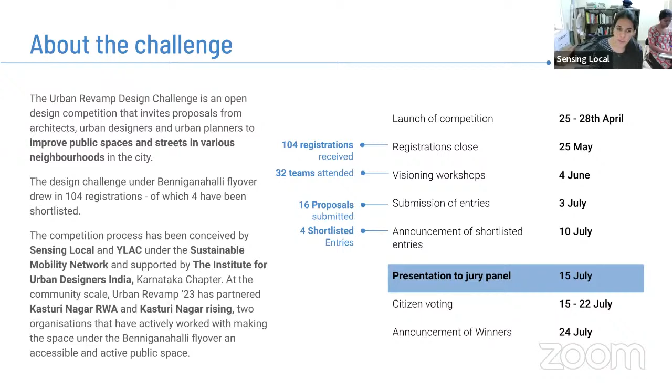We are currently in our presentation to the final jury panel. All the 4 shortlisted designs, apart from being scored by the jury panel, will also go out for citizen voting. This will be put up in the next week for the community group around, and post that we will be announcing the winners on the 24th of July. I would like to take this opportunity to introduce our esteemed jurors, all doing some amazing work out there.

Vinayak sir is not here. He's the Chief Engineer, BBMP Projects Department, but we have Hemlata ma'am here, who's the Superintendent Engineer at the BBMP Projects Department. Hemlata has actually been someone we have worked very closely with. She has anchored several projects related to TenderSURE roads, white topping, junction redesigns, under-the-flyover space reimaginations, and bringing a lot of innovative projects into the sphere of BBMP itself. She's also been part of several SWM projects previously under this department.

Rajiv, who's our next juror, is a program manager with WRI, and I'm sure all of you are aware of the work that WRI does. Rajiv has been anchoring several projects related to transit-oriented development. He himself is an architect, urban planner and urban designer. He is also a project anchor for the Hubli-Dharwad transit-oriented development project currently going on with DULT.

The next is Aruna. Aruna is the Joint Secretary of IUDI, also the co-founder of SDEG. I'm sure if you had attended Design Uru, you would have interacted with her, definitely one of the anchor persons even for that. She has worked on large-scale projects and multiple urban initiatives, and definitely believes in designing effective public spaces. She's also won multiple awards and spoken at many national and local forums about her contribution in the field.

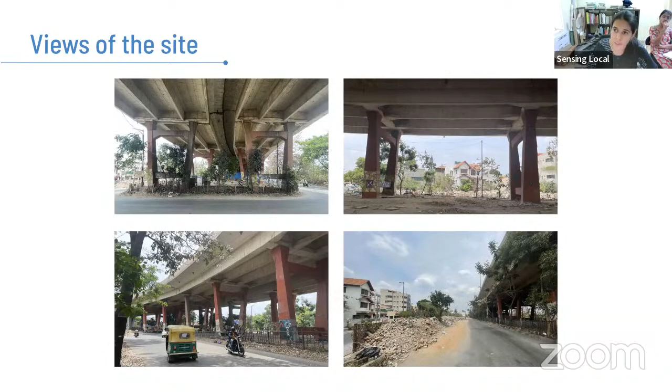Insights from the participatory workshop. We did several activities. The activity mapping, visioning statement, and a couple of issues is what I would like to bring to your notice.

The three predominant activities are: people who want to go to Vivekananda Park; people using it as a connection to Old Madras Road, so we have a lot of people cutting across the site; and a few vendors where people stop and shop. That's the current activity happening there, but we hope new activities get introduced, and you'll see it in the proposal.

The issues, of course, there are several issues on the site. This was all done by the citizens where they voted on the issues. The top 5 issues were unsafe crossings, dumping of waste, speeding vehicles, dumping of animal corpses and chicken waste, and it seemed an unsafe zone because of lack of lighting.

Within this, the priority was towards dumping of waste, dumping of animal corpses, and bad odor, which is really making it quite an eyesore, as well as from the smell perspective, not a pleasant place to be in or around.

Through the vision statements, there were several, but some interesting ones we pulled out: people would like a walking path, an amusement park, access to the lake itself which was not direct, better solid waste management facilities, animal waste to be taken care of, and a wish that the park gets rejuvenated. They're also looking at a feeder bus to the metro and designated parking spaces instead of parking on roads.

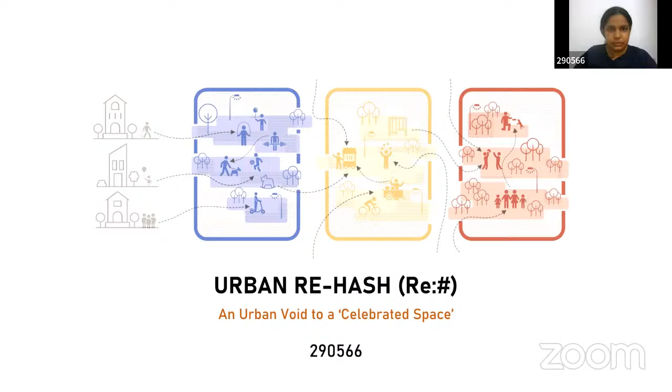Kasturi Nagar, an affluent residential neighborhood, landlocked between a flyover, multiple railway tracks, and a large lake, is surrounded by multiple open spaces lying dormant, like the Kasturi Nagar Park, the area under the flyover, a large green railway buffer, and Swami Vivekanand Park.

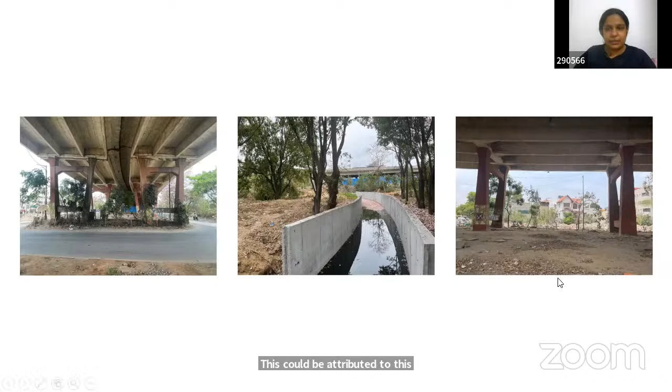However, despite so many open public spaces, there seems to be missing public life. This could be attributed to the spaces being unhygienic due to extensive garbage dumping, unsafe because of fast and disorderly traffic, missing crosswalks and footpaths, and poor lighting.

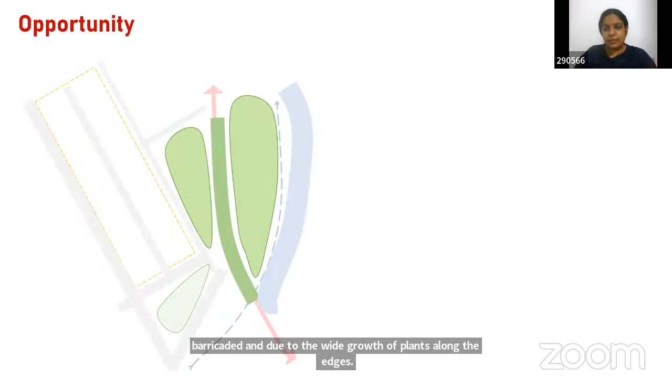These spaces are also inaccessible as they have been barricaded and due to wild growth of plants along the edges. Yet, the site comprising Kasturi Nagar Park and the area surrounding it is brimming with the possibility of having one seamless large open space.

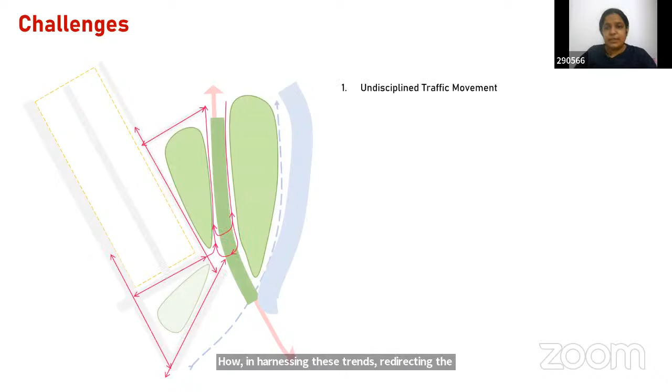There is an opportunity to rethink and redesign pedestrian movement for better connectivity. The abundance of natural wealth can be banked upon to create a sensory experience and have the site brimming with flora and fauna. However, redirecting the scattered movement of traffic and resolving the unsafe and complicated junction poses a challenge. Thus, the project Urban Rehash aims to amalgamate the fragmented open spaces into a coherent public place that caters to different levels of activeness, age, social groups, and safety concerns.

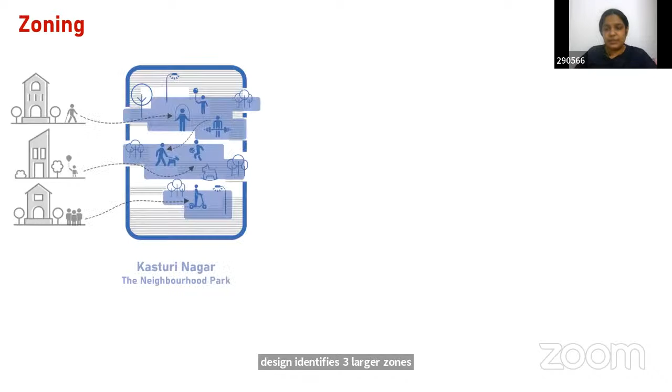To engage the diverse population and cater to their varied needs, the design identifies three larger zones. The Kasturi Nagar Park is imagined as the daily use leisure space for adjacent neighborhoods, catering to various age and social groups, and serving as a gateway for locals seeking relaxation.

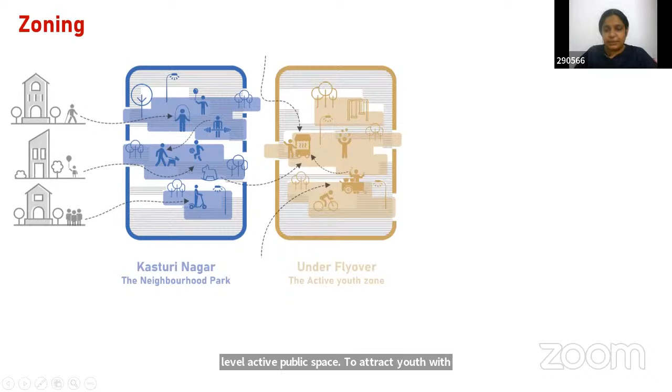The area under the flyover is designed as a district-level active public space to attract youth with opportunities to play, eat, and socialize in a safe and well-lit environment. And the lush green buffer will be the city-level public space, transformed into a picnic spot with lush greenery, cool breezes, and beautiful plants, birds, and insects benefiting from its proximity to the lake.

Coming to the placemaking strategies, to resolve the problem of the unsafe junction, traffic is being rerouted so that we can provide a signal-controlled junction here, while using this whole space as a single public space.

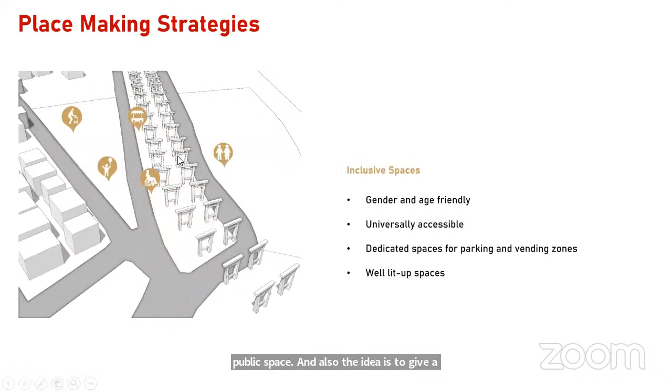The idea is also to give an inclusive design with respect to gender and age, universally accessible, with dedicated spaces for parking, vending zones, and well lit up spaces.

Talking about safety, cobblestone paving and tabletop crossings are provided to reduce the speed of traffic, and adequate lighting and signages for orientation and bulb-outs at the junctions are provided for safety.

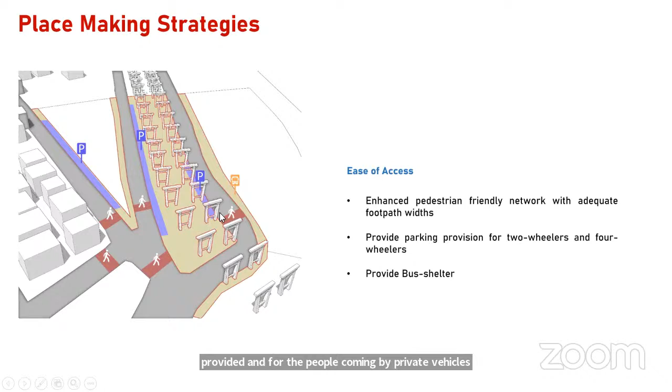For people coming by walk, tabletop crossings along with adequate width of footpaths are provided. For people coming by private vehicles, two-wheeler and four-wheeler parking pockets are provided. And for people coming by public transport, a bus shelter is provided here.

Talking about the Nala, the idea is to integrate it into the public space design by naturalizing its edges and planting native species around it.

These three street lanes are being redistributed to achieve a 4.5 meter wide carriageway and a 2.5 meter wide footpath. And these tabletop crossings provide a seamless connection between all three zones.

The BBMP shed is being retained with a facelift along with a composting unit proposed here. And the Nala's width is being increased at a few places, making it a vibrant water body, integrating it into the public space.

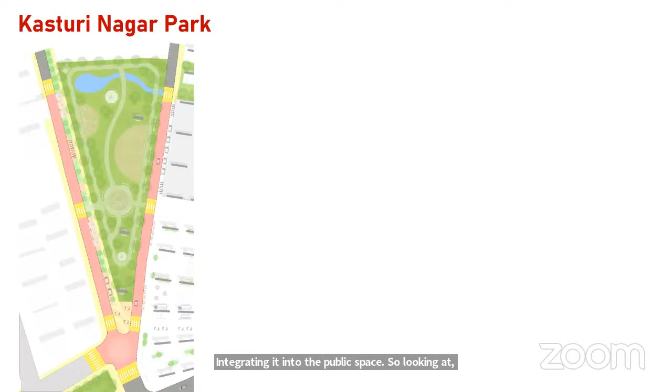Looking at Kasturi Nagar Park, from the visioning workshop it is understood that people require a day-to-day recreational space. So this park is designed with walking or jogging tracks, shaded seating spaces, kids play area, open gym, sports facilities like a badminton court, space for yoga or a laughter club, and a biosphere with a kitchen garden around it.

A plaza space is provided near the junction. This is the kind of space in front of the park entrance where we have tabletop crossings and vending zones, making it a welcoming feature. Around this biosphere, we can have kitchen garden kind of spaces where people can use it on a day-to-day basis.

So this is the character view near the junction. This is a signal-controlled junction with tree seating spaces and easy connectivity to the surrounding areas as well.

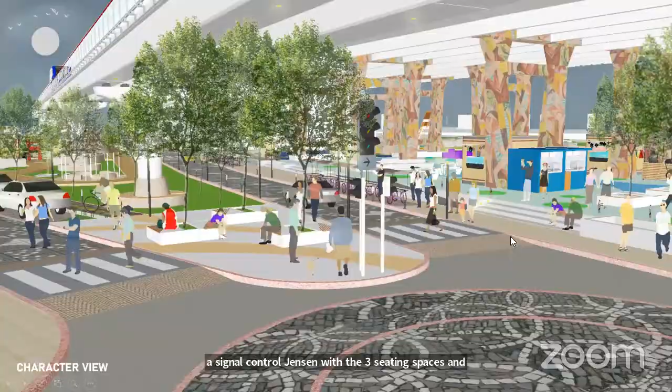And the under-flyover area, since it has road access on both sides, is mainly designed so that people from the residents as well as people from a little farther off areas can also use the space as a hangout spot. So small kiosks, food courts are provided along with plaza kind of spaces, and sports facilities like a skating rink are also provided.

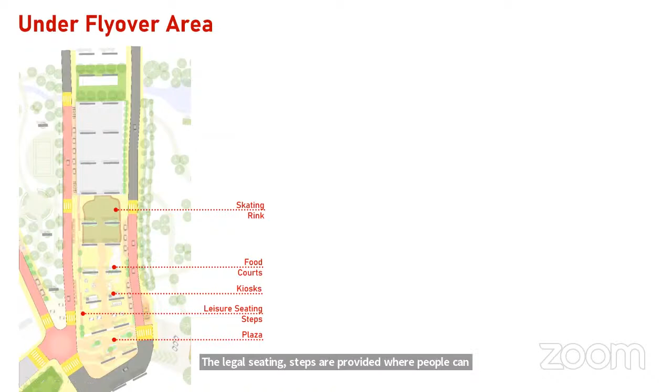The edges of the under-flyover area are a little raised from the road level. Making use of that, leisure seating steps are provided where people can enjoy the traffic with a cup of coffee. Parking spots are provided on either side of the road.

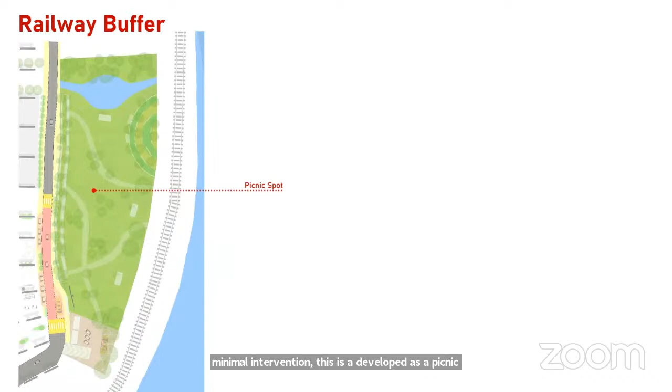For the railway buffer, since it comes under buffer area with minimal intervention, this is developed as a picnic spot or a community gathering space, and small events can be hosted in this space. Even vehicular access is provided inside, with all the basic facilities like public toilets and drinking water points.

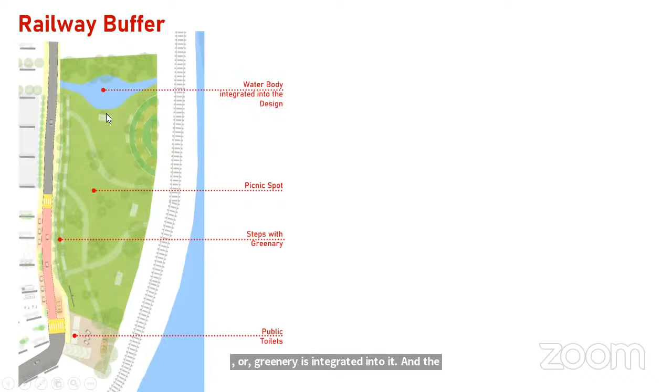All along the edges, seating steps or greenery is integrated into it, and the water body is also integrated into the design as an attraction. Watchtowers and strollways are provided within the green buffer.

The transformation is planned to be carried out in 4 phases, each improving the quality of public life. To start with, the area and its edges have to be cleaned of garbage and debris to improve visibility. Next, tactical interventions bring behavioral change like rerouting traffic, painting crosswalks, junctions, parking spots, and roads.

This also generates revenue through paid parking, which feeds into the next phase of developing Kasturi Nagar Park and its edges. Leasable vending spaces can be introduced to further generate revenue for the 4th phase, of activating the under-flyover area.

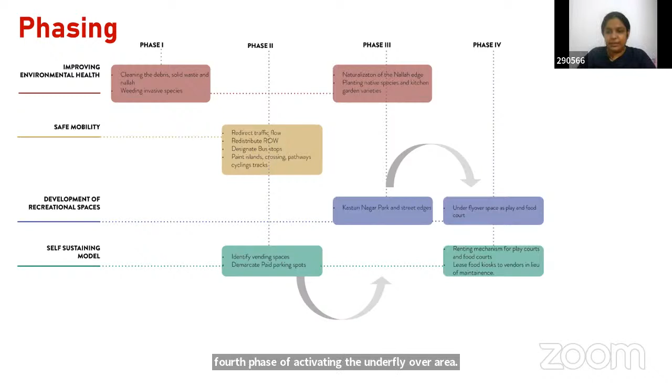These spaces can be earmarked for smaller gatherings and events apart from the daily life that will occur there. Eventually, the green buffer will be transformed in the last leg of the project development, and the revenue generated can be channeled into the maintenance of these spaces over time.

Thus, the urban rehash proposal rehashes the way we approach our public places, and through effective but minimally invasive interventions, transforms the Kasturi Nagar public spaces into a self-sustaining hub for social life, which looks like this.

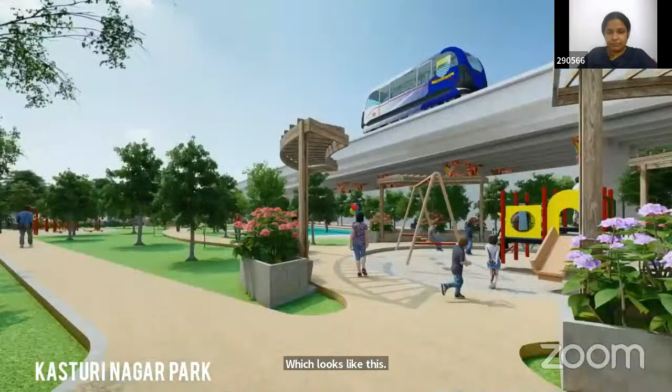In conclusion, thus the grounded design approach and temporal spaces bring Kasturi Nagar and its public spaces to life. Thank you.

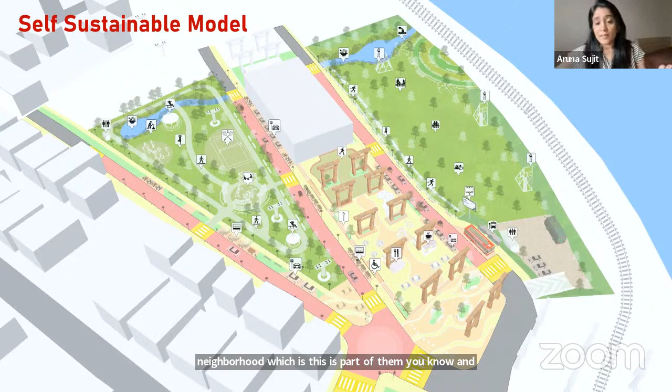Interweaving of neighborhood and the city level - where does that happen, where does that not happen? And in your drawings, now that you've done such great work, where are those fingers coming in from the neighborhood, which say this is part of them, and therefore we're giving it out to the city? So where is that sense of... did you get what I'm saying?

Yes, yes, we did get your question. Thank you for that question. It's actually a very important question, because like you said, the ownership - people feel that they connect to the space and they are very passionate about it. And that is why when we were transforming, when we were looking at the design, the first aspect that we thought of was the kind of activities we'll be proposing, because activities sort of anchor the spaces.

And that is why when we were designing the Kasturi Nagar park specifically, we were very sure that the activities we wanted to give was what the residents, immediate residents, needed or wanted. So it is actually for leisure, the kind of things that you would do on a regular basis, like take a walk, a morning walk when you have a routine, or you go to the park with a group of friends. So those kind of activities we made sure to incorporate in Kasturi Nagar Park.

Then moving forward, where we would want it to be a little more active, and probably want more people to be coming in, that is where under the flyover we differentiated. This place could have more visitors, and what brings in more visitors is more variety of food options, a little more vibrancy, a little more crowd. That is why we kept the under-flyover area a little open and had activities that cater to more people, and a specific user group we focused on here was young people who would want to be playing sports - and we didn't limit it to just Kasturi Nagar, because that sort of opportunity to play free sports is missing across our open spaces, so we tried to keep that within this area.

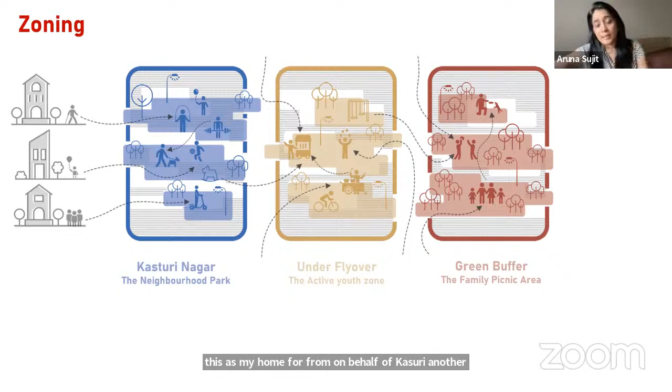Maybe it didn't come through clearly. If I consider this as my home on behalf of Kasturi Nagar residents, there is one level of privacy, then semi-private, then public. So where does one stop and the other begin? Because after some time we give this amazing vision, and it becomes a problem when you can't stop it.

Who are we to stop the public from using this? Right now we are doing it for two things: primarily the network at the larger level. As an urban designer, and also as a Kasturi Nagar resident, city is very important to me. The systems should not be broken, which is your flyover, your metro, and under the flyover.

The other thing is me being part of Kasturi Nagar. After some time, what we provide should not become a nuisance to them in the end. That's always a challenge, I don't know how to deal with that. So that kind of clarity is already there in your activities, but I don't think it's coming across in your drawing. But yeah.

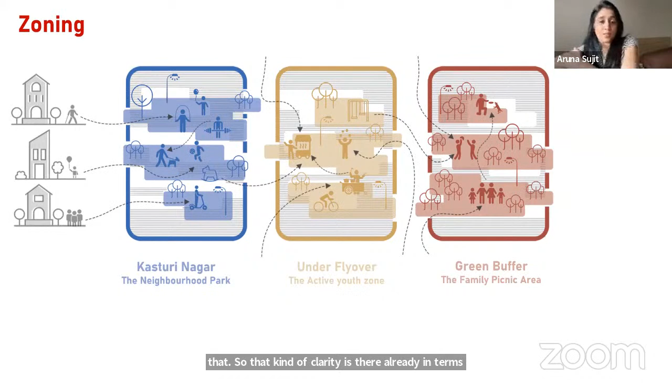I have a question, go ahead Ankit. Some of the issues around the site are mostly around dumping that is happening. If you look at the issues on site, how is your design responding to that? The number one issue was garbage dumping and animal waste. How are you solving for that?

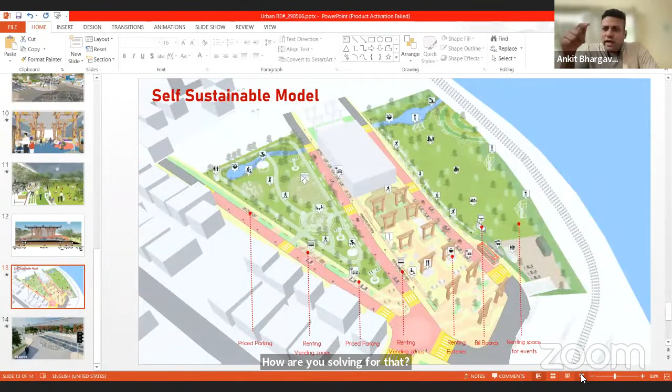Second, if you look at the Rajkaluve itself, it's actually full of sewage. So how are you looking at solving that? Because you have to solve it by design. Right now it's pretty much sewage water, so opening it up doesn't help.

Third question, you can answer one after the other: I see that the edges, whether it's the water or the road meeting the park, are of concern, especially the tertiary road on the railway line side, which is still a thoroughfare with city inter-neighborhood traffic happening there. I wanted to understand that, and also the railway side, since you can't really touch the railway. So I'd like to understand your ideas around treating these edges, whether it's the water in the park, the road in the park, or the railway in the park.

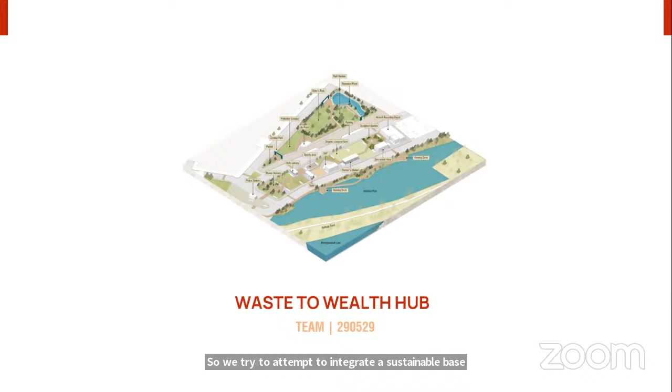We are going to talk about our proposal, the Waste to Wealth Hub. We attempt to integrate sustainable waste management practices with placemaking principles, creating vibrant and efficient ecosystems that maximize resource recovery. Our objective is to create an innovative urban node linking diverse ecological resources, transit nodes, and movement corridors, generating a waste to wealth system that gives citizens of the neighborhood an alternate reason to be proud of.

Moving on to the area level strategy, it aims to implement sustainable waste management practices that engage local communities and optimize infrastructure to preserve the lake's ecosystem and promote a circular economy. During community interaction, the elders spoke about their aspiration to utilize this area for a better purpose, so we took cues from it.

The broader area level strategy was to first tie up the various assets surrounding the site, including the lake and its fragmented wetlands, Kasturi Nagar Park, and Vivekananda Park, finally connecting it with transit nodes such as the upcoming metro station by pedestrian linkages, enhancing the everyday experience of residents.

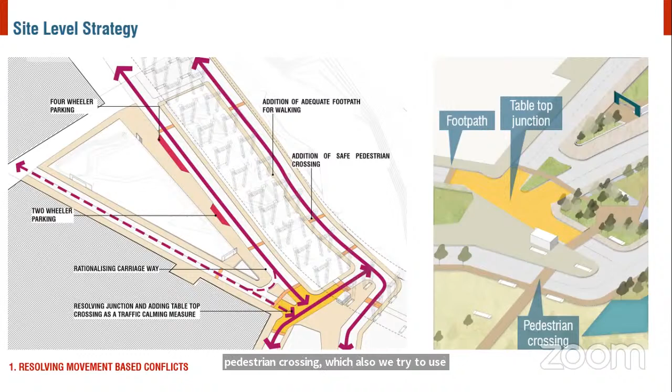Keeping this in mind, we tried to resolve movement-based conflicts by redefining the right of way of the highways and surrounding access roads, rationalizing the carriageway, providing adequate footpaths, parking zones, and safe pedestrian crossings. We also resolved the junction to achieve safer pedestrian flow by providing a tabletop crossing.

We also tried to add new programs to build an ecology and economy around the waste. Instead of removing the whole waste processing unit, we integrated it by providing a high-tech waste recycling unit, from which inert waste is used to produce public art that can be reused and sold at a zero waste shop.

The organic waste from all over the site will be treated in an organic compost farm to promote urban farming, from which fresh produce can be used in a farmers market and organic cafe to promote recreational activity.

The underutilized wetland will be converted into a wetland park by creating a constructed wetland, which will naturally clean the grey water coming from the Nala and the residential area, and soon create its own natural biodiversity zone. This can also decrease flood submersion scenarios on site by restricting access, and odor can be reduced by vegetating with native plants around the area.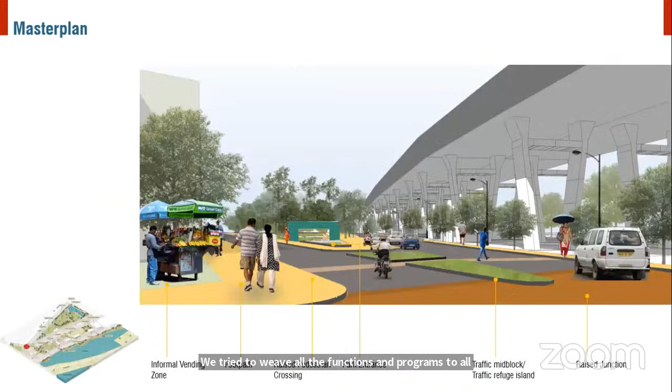This is a view of what we're trying to achieve, showing informal vending and more eyes and surveillance on the site, which can be one of the ways to reduce crime or illegal activities going on in the site, as we found out through informal local conversations.

This is the view of the sculpture garden and the organic compost farm, and finally the view of the park showing the pedestrian trail connecting to the under-flyover zone. Finally, the impact assessment shows what we try to achieve on site.

The whole aim of the project, and how we try to see it, is to use waste as one of the main sources that is not shied away from but actually integrates the whole community.

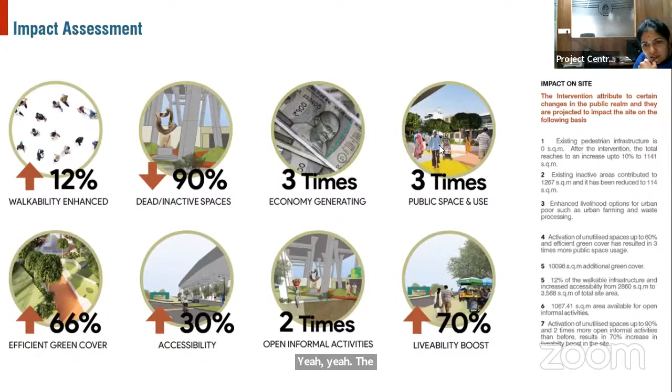The proposal is looking at the farming and composting done in the same area. What is the quantum of waste being received from the two wards? There's waste coming from two wards, so what is the total quantum coming in? Are you asking about the amount of waste?

Yes, that wet waste. That wasn't in our scope. But when you make a provision for composting, composting when it starts decomposition gives pungent smells and such. How much quantity can be handled, because it's daily waste coming there? So the area allotted for that also has to be considered.

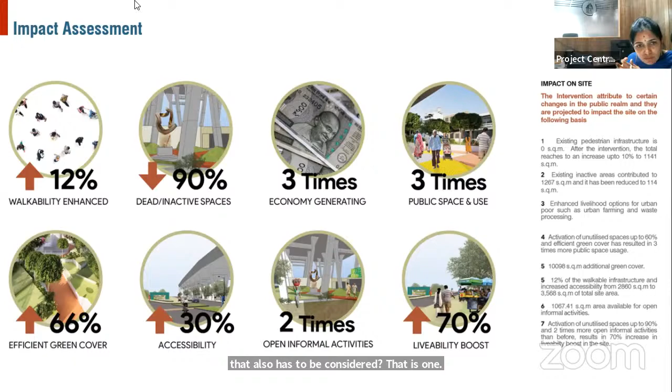That's one point. And the second point is about the farming you've suggested—what kind of farming, and who is it actually for? Is it for the neighborhood, or someone from the government side, someone needs to get them there. What does your plan actually say?

For the farming or organic compost farm, we thought not directly from the neighborhood, but rather there are a lot of squatter settlements around the site, on the adjacent edge of the railway track, towards the Benniganahalli Lake side. We were looking at those squatter settlements, thinking we could integrate them into this process, because otherwise we cannot. The main idea was to integrate the urban poor, so this organic compost farming and related activities like selling the produce would become an alternate income source for them.

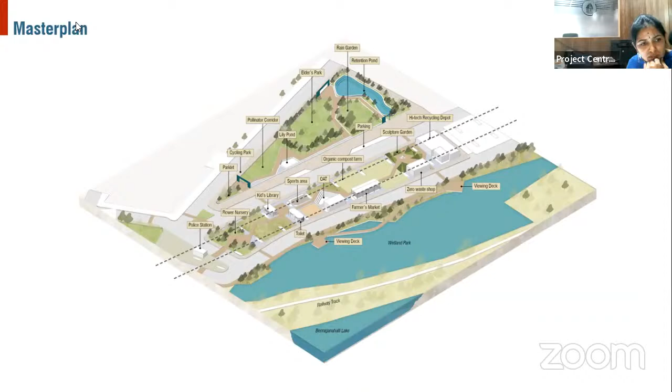Also, one more question I had for the previous presenter as well: the wetland shown here—what actually is it? It's a buffer of the railway department.

At present, from the site visit, we saw there was already a ditch there, and the drain coming from the Kasturinagar neighborhood had the entire grey water directly going into this ditch. We thought of treating that by making constructed wetlands so the grey water gets filtered, and working around its edge to make it a more attractive wetland park.

Rajeev, I believe you had a question. Yeah, I'm still a little confused about this whole wetland section. My question was: if you see the Raja Kaluve extending and the canal extending to the other side, it has a dead end—is that continuing underground, or is it actually a dead end, meaning there's stagnation of water, creating other maintenance issues?

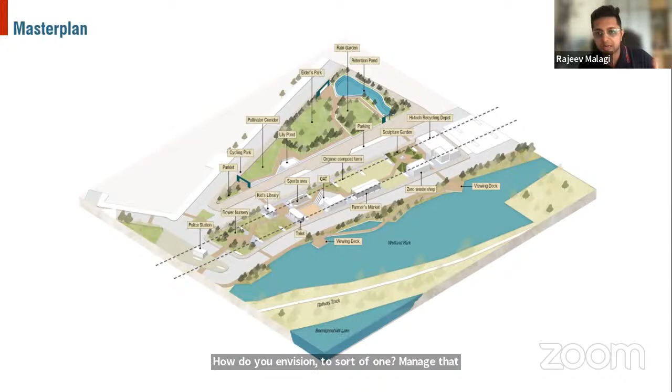The connected question was about this wetland park you've shown—how do you envision managing it in terms of smell and overall management, including the canal, since I believe that whole thing is an interconnected system?

That was one. And my second question was about this high-tech recycling depot—it will also, to some extent, encourage vehicular movement, like trucks and smaller trucks coming and parking there to get the waste out, right? How have you considered not obstructing current traffic movement, since the roads are right next to it on either side? Just to figure out how you're going to manage the traffic and the wetland ecological treatment part.

I'll start with the high-tech recycling depot question. If you look at the master plan, on the right side of the high-tech recycling depot, there's already a provision kept for the trucks which will carry the garbage and unload it into the processing areas. That was one way we thought of resolving this issue, so it doesn't obstruct the thoroughfare and through traffic of the service lanes of the highway.

For the wetland park, we used indigenous species and a tree lining all over the edge as strategies to tackle the odor problem. But other than odor, the most critical problem we found was people dumping animal corpses there, and a lot of illegal activities happening. To tackle that, we thought of increasing visibility, which would also help stop these activities from happening. That was the basic strategy.

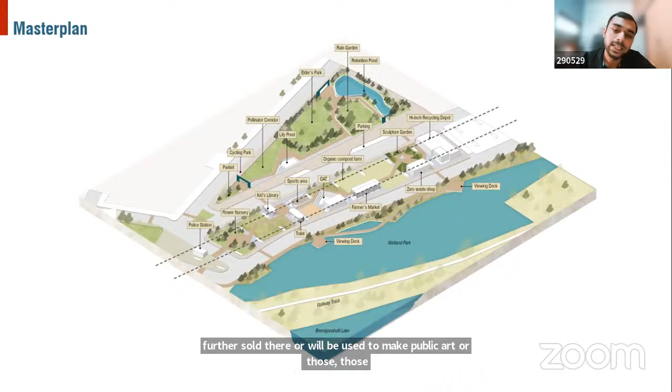What is a high-tech recycling depot? It will have one area where waste is processed. Already a first level of segregation happens in households, and then it comes to the high-tech depot where a second level of segregation happens, separating organic and inorganic or inert waste for further processing. Since we talked about the zero waste shop, this waste would be processed and sold there, or used to make public art and associated things. The organic waste will be used for organic compost farming. So it will actually have all these functions together.

One thing that came up in the discussion with the community is that they did not actually want a dry waste center there at all, because it wasn't catering to that want. So by expanding that, you kind of have to justify that land they actually want used for recreation and other things is going towards something else. The way you're describing the high-tech depot, it's sounding the same as a dry waste collection center - I don't know what the difference is.

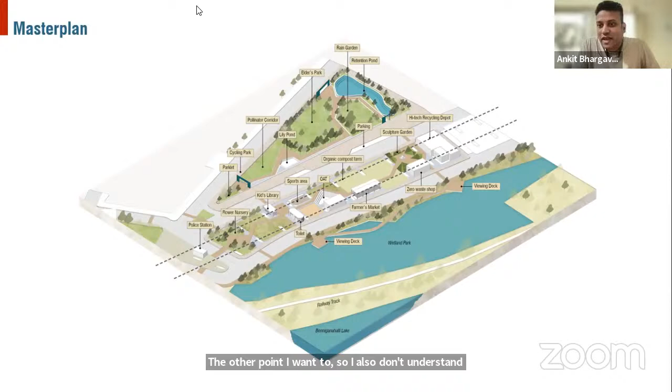The other point is I don't understand what farming under the flyover means, because it's not as if you get sunlight there most of the time - there's dissonance happening right there. I also don't see the Raja Kaluve extending itself from the park to the wetland in your drawings - I see that missing. Fourth, I think the way you've drawn the wetland park right now is closer to a lake, which sends the wrong signal to someone looking at the drawing who doesn't know what's happening here.

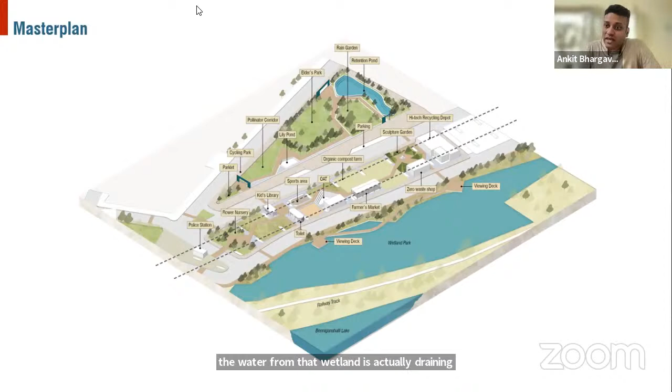If you look at the site right now, the water from that wetland is actually draining into the Benniganahalli Lake - there's a hole where it goes through, but the level would be much lower, and you won't actually see much water at all. So the drawing is sending a false impression of reality, even if we implement your design. So I have 2-3 issues: the waste issue, second is farming, and third is the wetland. I'll stop there.

Are there any other questions or comments?

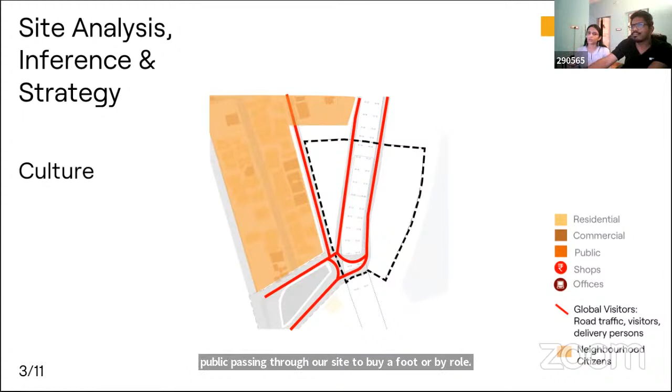In terms of stakeholders, we have two broad categories: global stakeholders, which are any kind of public passing through our site by foot or by road, and local stakeholders, the residents from the nearby localities and neighborhoods visiting the site.

In terms of program, our program responds to the various use cases, various users, and certain issues that the site faces at large. One major intervention is the BBMP shed that is located currently under the flyover has been strategically shifted towards the local neighborhood in an attempt to make sure that it is properly maintained and kept clean.

There is also a dedicated zone towards the north of our site for delivery personnel in the form of a rest point, placed centrally with easy access from both the flyover as well as the service roads.

Coming to connectivity, it is very clear that the site currently is largely vehicle first, wherein we have highly congested traffic nodes with fast moving vehicles that ply on the roads throughout the day, with very little importance given to pedestrian movement and accessibility.

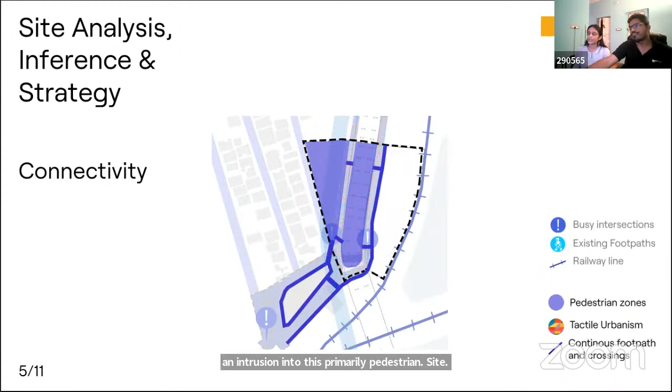This is addressed in the strategy by viewing the site as a pedestrian first zone, wherein any kind of vehicular movement is seen as an intrusion into this primarily pedestrian site. This connectivity is further enhanced by adding continuous footpaths and zebra crossings throughout.

In terms of safety and hygiene, it is very clear that the site suffers from levels of degradation, such as garbage, etc. We have viewed the site in the form of three different areas, moving from uprooted, neglected, and highly polluted. In terms of our intervention, providing various amenities such as public washrooms and dustbins throughout the site would help mitigate the issues caused by pollution.

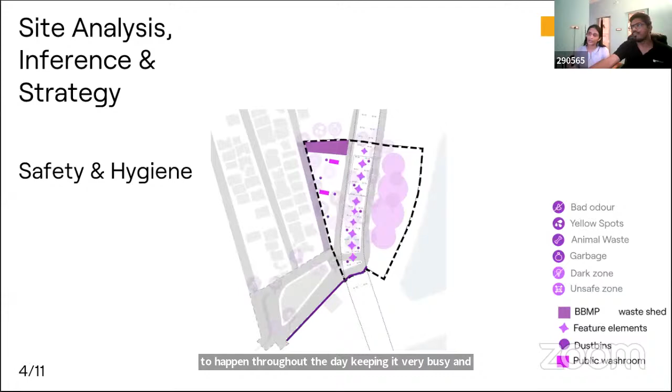The aspect of safety is treated through various levels. The program itself is designed such that the site allows for a lot of activity to happen throughout the day, keeping it very busy and safe. Various design elements have also been added to ensure that it is well lit.

Coming to our concept, our design mainly stemmed from the existing columns on site, which helps create Noolus or threads that tie together the various spaces. These then go on to form Neralu or bays, which are surfaces for building our various site level programs. These create or frame these perspective zones for various activities to take place. Noolus translate to these vertical elements in the form of bollards, landscaping, trees, posts, pillars, etc.

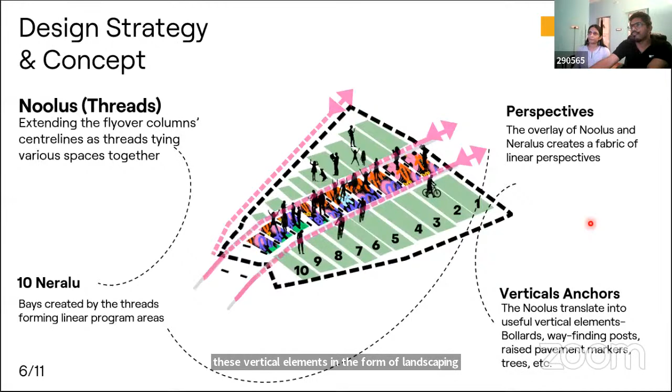After having created the 10 zones or the Neralu, we have different types of zones for each one of us: yoga recreation zones, open schools, dog parks, senior citizens park, flea market, and different scales of gathering space as we move on and see in the master plan.

After having identified the three zones as the uprooted, neglected, and the polluted, the master plan took birth from that. The first thing that we tackled was on the south, we closed up one lane of the road to include it within the under-flyover space, and that allowed this turn to slow the vehicles down, because our overall aim is to make it more pedestrianized, and this turn allows you to do that.

On the north, we introduced a loop road to access the BBMP shed for the trucks in the mornings, whereas in the evenings, that same road top space acts like a parking for the food trucks to park themselves away from the main road.

Shifting the BBMP zone here on the north creates this large uninterrupted 3.75 acre urban space at the bay. So we didn't just look at it on a master plan level at this scale, but rather, as we discussed earlier, there are these 10 bays that we created running from west to east.

That's helped to bring down the scale to a human level, having had 3 subspaces. Neralu 1 would have the BBMP shed, and then the delivery zones, delivery persons parking, and resting spot.

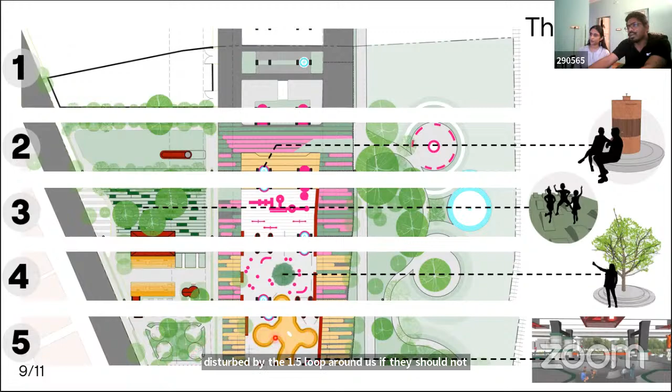Coming to Neralu 6, we have the dog park, which is cordoned off by the bollards, since they didn't want the dogs to run helter-skelter, as people are apprehensive about that.

Spread across Neralu 6 and 7 are the two badminton courts and basketball courts.

Neralu 8 and 9 has the police watchtower, the orange colored one that you're seeing there, which acts like a visual anchor element for the traffic junction and the bus stop there, and also the temporary exhibition space under the flyover.

Finally, on Neralu 10, we have a space for people, a temporary gathering space for RWA meetings, for any demonstrations as such.

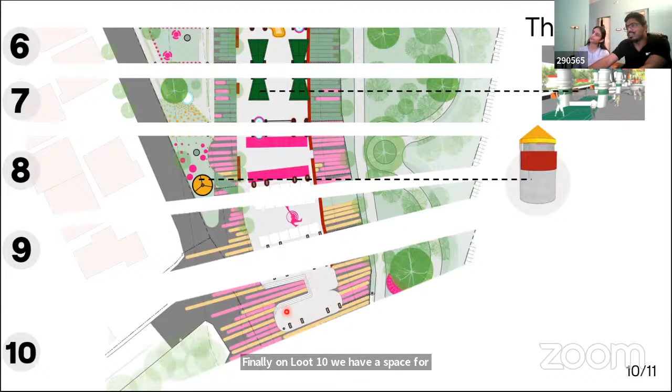Coming to the walkthrough, we will be starting from the second main road, abutting the residential area, and gradually move towards the flyover.

Starting off with Neralu number 2, this is for yoga, recreation, and habba area. This is Neralu 3, which is a children's zone. Neralu 4 has a plant care and OAT area with pods for areas like daily dump.

This is Neralu 5, a senior citizen zone overlooking the skate park. Neralu 6, which is the dog park. Neralu 7 and 8 comprises of the bus stop as well as the police watchtower area.

Raised pavement markers as well as painting the roads helps reinforce the concept of a pedestrian first area.

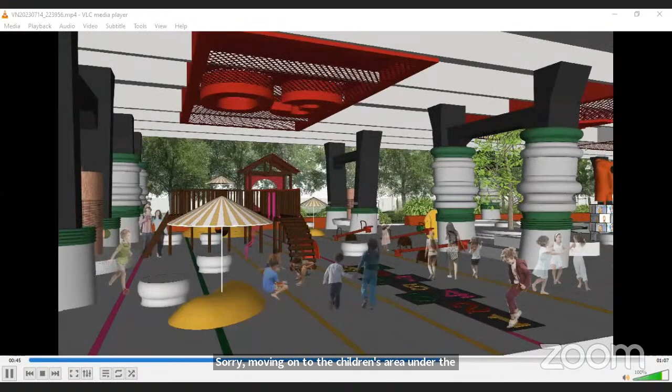Sorry, moving on to the children's area under the flyover, this is a children's art display as well as a Wi-Fi enabled neon tree zone. This would be the children's skating area.

We've clad the columns with these Channapatna inspired FRP moldings to respond to the sharp edges of the columns as existing on site.

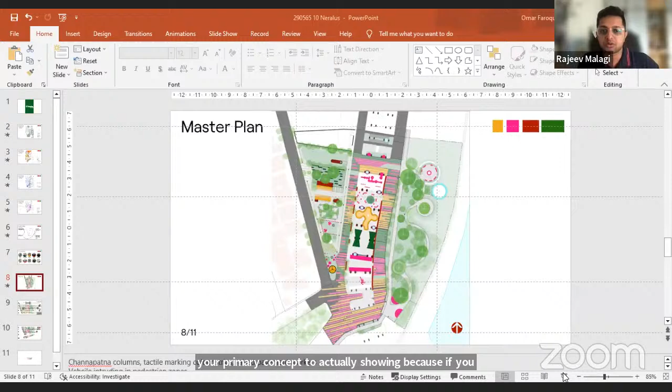But eventually, for some reason, when you start breaking them into smaller components, the left side is where you've done a lot of pocket spaces, but then I somehow felt the transition from left to right was completely lost when you moved from your primary concept to the actual design, because if you look at the park on the right, it doesn't have any translation of those sections you're talking about. Eventually it becomes an independent element.

So if you want to take your same concept of columns to the actual translation of design, I was really hoping that language could have been translated in some way to the other side of the site, also using landscape as a medium to do that. And the other first doubt I had was about the roads — you're saying you want to prioritize pedestrianization there.

Is it open to traffic or are you planning to close it? It is open to traffic, but our idea is that because of the surface being painted in this alignment, with markers at regular intervals aligned with the columns, we believe vehicles would slow down, creating a feeling of intrusion for commuters without endangering the pedestrian.

So if that is the case, that's the other concern I have. You're assuming that psychologically, because of these elements, vehicles would slow down, but someone who wants to reach somewhere fast would still speed up, right? There are other means to actually create heavy traffic slow movement zones while facilitating the movement of pedestrians from left to right.

If you had explored options of materials and design elements which could slow down traffic, or maybe created alternate loops—I'm not sure how practical that is—some portion could have been restricted to traffic, which also would have worked. But if that's not possible, there are still ways to slow down traffic, not just with paint, but with many design ideas and materials.

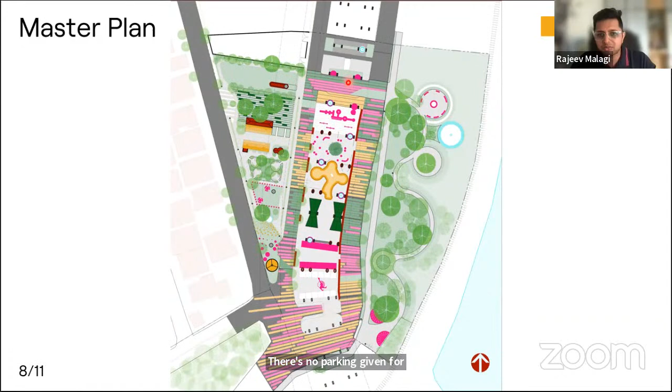Any reason why you're prioritizing food trucks and delivery services so much—is it a need in that area? Since the area on the left-hand side is bordered by a dense neighborhood zone, we imagine there's lots of zipping around of delivery persons. This is on the flyover, so any delivery person can come down, pop in, park, rest and go out. Even second main road delivery persons entering can do the same—that's why we prioritized it.

One question—am I audible? Yes. What is your thinking about the future scenario when the Benniganahalli metro station comes, let's say within the next three to five years, with Bayappanahalli on the other side? This is kind of a conduit, and probably this is going to get used much more than it is now. What future aspects of mobility have you taken care of, or what thinking has gone into the future scenario of this space?

In terms of future mobility, considering there will be two linked metro stations, what's usually common is a feeder bus that connects them. So we've provided a flat urban plaza which could function as a bus stop. This space would be a collection hub, a pedestrian node, almost like a signal point for waiting for buses. The place in general is like a collection point for people—we've integrated all kinds of activities and possible programs, making it a good pause space for anyone in commute moving from one place to another.

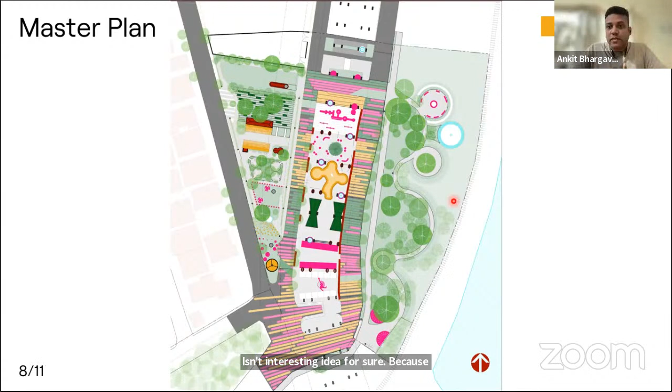And the second comment - I was quite surprised, using pillars as a way to organize the space, which is strange actually as a collective space, is an interesting idea for sure, because it gives a way to structure the space and divide and cause many things to happen at the same time. But to me it actually looked like a highly overstimulated space - almost like pop art, and it's not even real. I can't imagine this implemented because you'll bankrupt BBMP - the amount of elements, the amount of things happening. So just trying to understand the idea of an overstimulated plan on one side, and second, did you think about the road becoming fully pedestrianized, if being pedestrian first is your priority?

To respond to the first question about this middle road which connects to the flyover - if we wanted to make it completely closed off for vehicles, yes, that's a very ideal situation. But we saw vehicle movement as a necessary evil, because those vehicles would start overloading the second main road and then loop back near the Bangalore One Center. So our stance would be not to close it off for vehicles, but apart from the tactical measure of painting it - I don't know if it got captured or lost in translation - along those center lines of the columns, what we called nulu also translate as raised pavement markers, these yellow color pucks placed along, nearly 10 of them. That also aids, apart from the temporary painting of the road surface, to slow down the vehicles, is what we believe. So that's about the road part.

Coming to the second question about it being divided using the column center lines, and being overstimulated - yes it would appear so, but our aim was that it should not just function on a big scale as a big urban space, but dividing into these 10 zones, which vary from 10 to 12 meters between the columns, which are say 30 to 40 feet apart. It helps to bring down the scale. That was the reason for using the columns as a guiding principle of the concept. Along those grids is where smaller pillars get placed for wayfinding boards, to help one orient themselves in such a large space.

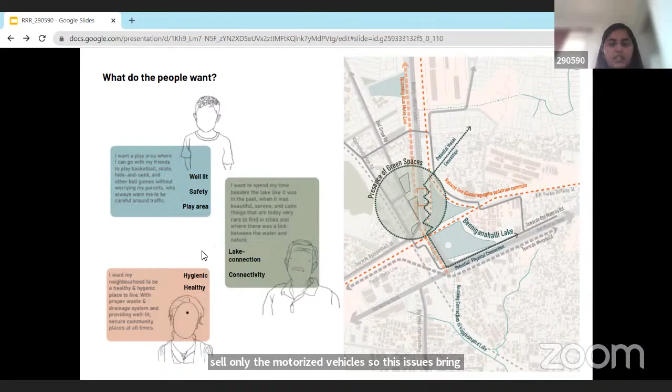The third aspect is to re-establish the connection to the lake, which is disrupted due to infrastructure built to serve only motorized vehicles. These issues bring forward and highlight the potential of the site for creating a variety of green spaces where users can engage with the site through multiple placemaking and community building activities.

Based on our understanding of the site, we came up with the concept of Recharge, Revitalize, Reconnect for this site. The first part of the site is envisioned as an urban park where residents of Kasturi Nagar can recharge after a long day. The second space, under the Benniganahalli flyover, is revitalized to become an active space, not just for residents of Kasturi Nagar, but the entire city.

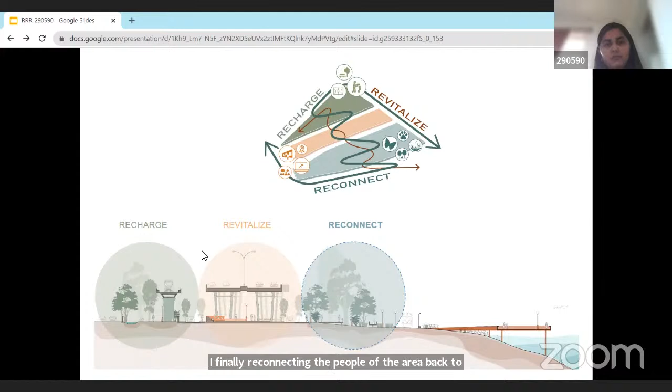Finally, reconnecting the people of the area back to the lake is an integral part of the design, because we found that people of the area had a deep nostalgic connection to the lake.

Now coming back to the spatial planning of the site, our design aims to connect and integrate the different parts of the site into a large urban park using an integrated network of trails, paths, and boardwalks that connect to different types of activity nodes within the park.

We use water as a running theme that is celebrated throughout the park, using water features such as retention ponds and grassways filled with water running along the trails in the recharge zone. The acrylic art installation on the flooring symbolizes and reflects water in the revitalized zone under the flyover, along with a shallow water body that continues the narrative of water under the flyover.

In the reconnect zone, we have visualized the space as a wetland with a number of bio-infiltration ponds and bioswales that connect to each other, acting as a miniature of the traditional lake systems of Bangalore.

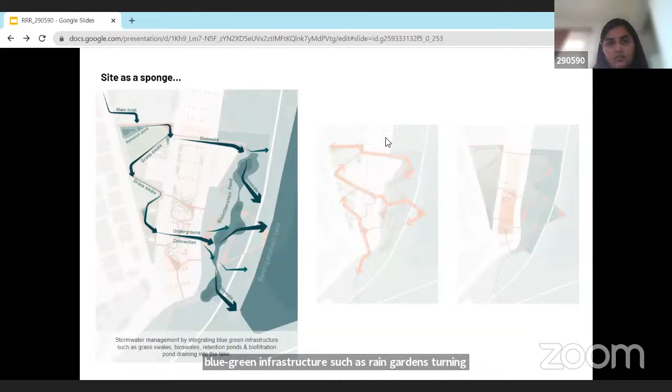Moving forward, these sites serve as a stormwater management system for surrounding areas by incorporating blue-green infrastructure such as rain gardens and bioswales running parallel to the roads, which open into the retention pond, from where surface runoff is carried to biofiltration ponds, to bioswales, and finally draining into the lake.

Moreover, by keeping the total built-up area to a minimum, the site acts as a sponge for the stormwater. This would also help to effectively manage stormwater runoff and reduce the occurrence of flash floods, which disrupt day-to-day activities in the

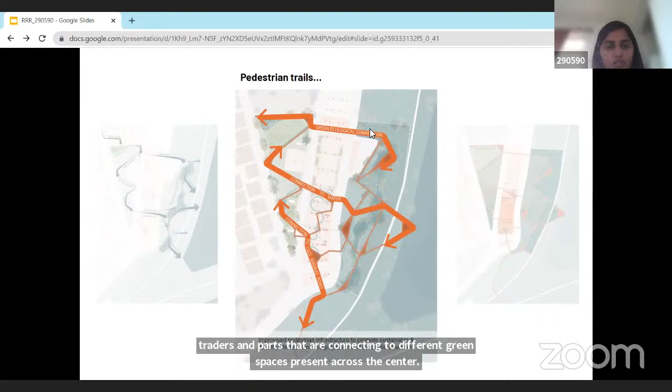area. The network of integrated pedestrian trails is an important part of site design and planning. The green ecological connection refers to the series of trails and paths connecting to different green spaces present across the site. The connection to the lake consists of a series of boardwalks, ground trails, underpasses, and overbridges to provide access across the railway track.

To provide the connection to the old Madras Road, we have established a pedestrian walkway incorporating the existing Kasturi Nagar underpass and the existing walking trail along the southern part of the Benniganahalli Lake. In order to ensure safe accessibility throughout the site, improving the existing streetscape by providing better street infrastructure like street light, walkway, ramp, etc. is also an important aspect of our design and plan.

So we have divided the site into multiple activity zones based on the requirements that came forward as part of our community engagement and mapping exercises, keeping in mind the location and the footfall that the activities will generate. The Kasturi Nagar Park, towards the west of the site, is planned as a community-centric park where the majority of programs cater to the residents of Kasturi Nagar, as the park is near to the

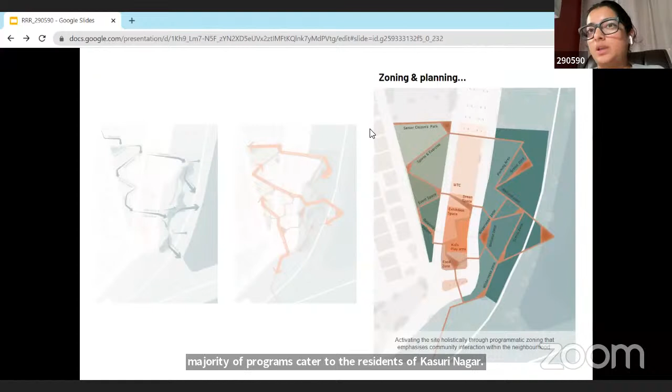You're not audible. Your voice is breaking. Hello, Aditi. Just a minute. Sure.

The area of the flyover is planned as a dynamic space that transitions seamlessly from

Sorry, but your voice was not coming through, it's breaking. Yeah, just a minute, we are resolving the issue. Sorry. Hello, is my audio better now? Yes, it's better now. All right, so I'll just continue. We lost whatever you were saying for 30 seconds. Sorry, we didn't hear. All right, you can go through the whole slide again.

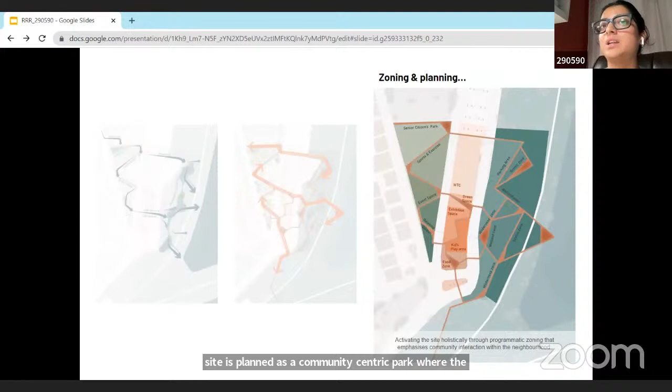So we have divided the site into multiple activity zones based on the requirements that came forward as part of the community engagement and mapping exercises, keeping in mind the location and footfall that the activities will generate. The Kasturi Nagar Park, towards the west of the site, is planned as a community-centric park where the majority of programs cater to the residents of Kasturi Nagar, as the park is near the neighborhood. The area under the flyover is planned as a dynamic space that transitions seamlessly from day to night with changing activities.

The part next to the lake is planned as a minimal intervention and ecologically sensitive park where people can engage with the local plants and different species of birds and animals that nest in and around the lake.

The recharge zone is primarily developed as a community-centric zone where large open spaces are provided to allow flexibility of use based on community needs for different types of gatherings and programs. Within this area, we have also incorporated jogging tracks, open-air gyms, and playgrounds for children to promote physical fitness and health in citizens of all ages.

Relaxation gardens provide space for leisure and can also be used by senior citizens to reconnect with nature while relaxing. Within this zone, we have also allocated a zone for community farming, which can contribute to strengthening community bonds and can also help in effective waste management by promoting organic composting techniques. This would also encourage the use of organic and homegrown produce that will enhance the health and quality of life of the citizens.

We are envisioning the recharge zone as an oasis for the Kasturi Nagar residents, a place where community grows and interacts. One of the most important features

of this space is the waste management aspect, promoting the circularity of food production, waste generation, and waste management in terms of infrastructure and construction materials. We want to keep the space as natural and low maintenance as possible by promoting the use of local materials and practicing reuse and recycling wherever possible.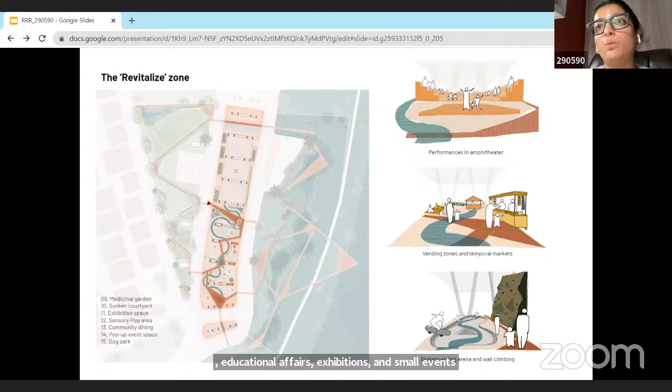This area also facilitates sports activities like skateboarding and wall climbing that are not commonly present in the Indian context.

One of the key features that came out of this community mapping exercise was poor to no light infrastructure under the flyover area and the streets, making the space feel unsafe and inaccessible at night.

The most prominent feature of the proposed space is the dynamic quality of the urban landscape that transitions seamlessly from day to night, where light installations light up after dark, making the site safe and accessible, keeping it active throughout the night. We are imagining the area under the flyover to be well lit, not just with activities such as vending and temporal markets, but also with a series of light-based art installations that could further add to the character of the space and give it a unique identity.

The site is designed to enhance biodiversity by providing a habitat for local birds and animals, by incorporating native plants, trees, and shrubs to create ecological corridors and support local wildlife.

The most important part of the design is the connection to the lake, where residents are able to access the lake as in older times.

Ecologically sensitive and natural design features on this part of the site help with stormwater management while also encouraging people to engage with local flora and fauna. The use of rain gardens, bioswales, and retention ponds as prominent design features of the site also double as an educational opportunity for visitors.

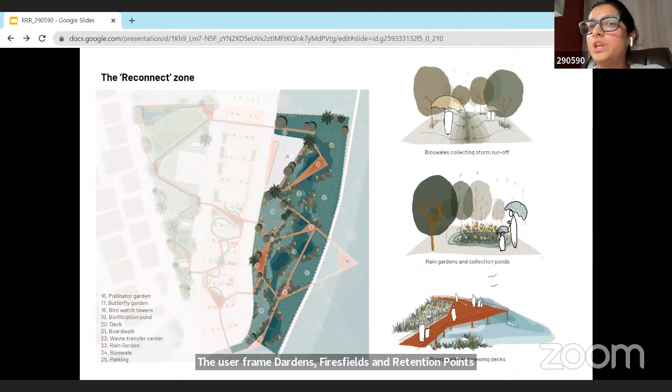We are imagining the Reconnect Zone as a series of boardwalks meandering through different landscapes within the site, providing visitors the opportunity to connect, engage, and educate themselves about the lake ecosystem and how important it is to the city of Bangalore.

Viewing decks and watchtowers can be incorporated in this part of the site where people have the opportunity to pause, reflect, and interact with nature.

To conclude, through this design intervention, we want to enhance the existing natural and built environment while addressing the ecological and social challenges that the site brings forward. Through our design and planning strategies, we hope to promote sustainability and increased community engagement that not only helps to liven up this area, but also further helps in the long-term maintenance of the quality of the space.

Thank you. Thank you. Thank you.

We can open it up for questions now. Aniruddha, I have sent one question. Yes, Aniruddha has a question.

There is a windway tunneling effect because this site is on the east-west open conduit from the lake towards the road leading to Banaswadi. What will be the impact on the waterline trails?

You're talking about... sorry, Kelly, you continue. So, I'm trying to understand the question, how the wind is affecting the water. That's what they're trying to say. Wait a minute, I wanted to know your thoughts. Have you thought about it, that there is a major wind conduit happening here because it's east-west, and how it will overall impact your trail farming and all these activities? Have you considered wind as a factor to think about when designing this?

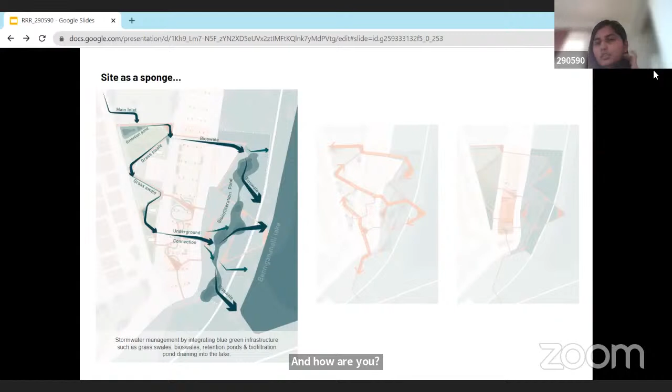So actually, when we were thinking of water management, we were thinking just of surface runoff, not particularly the wind, which will change the movement, because most of the bioswales and green swales are thin strips, and the main inlet is from the Rajakaluves and the drainages which are running parallel to the road. So more or less, the wind is not going to affect the surface runoff. Basically, that was what we thought. But yeah, we can also enhance and use this as an opportunity for further development.

Just to add to Kelly's point, I think it is a great question, and we had not actually taken it into consideration. Moving forward, I think it can be an important aspect to keep in mind while designing.

So do that when you will be doing another design, or even in this project. Wind has a tremendous effect here, also because of the setup of this place. On one side there is a residential zone, and wind, when you are keeping open land, especially land for farming, will create a lot of dust when there is no crop there, or during dry periods. So when there is an open ground, there is a liability that there will be more dust flying in the overall area.

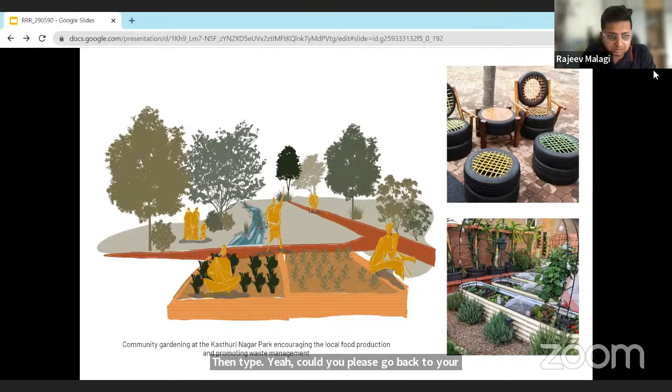Can I just mention it? It's rather easier to ask than type. Please do. Could you please go back to your initial diagram on the water movement, the first map?

Yes, sure. Is this indicating the slope of the ground and the way water moves, or what is this indicating? Is what I wanted to understand, the blue arrow. So yeah, this is what we are trying to basically play with the water. As the Rajakaluve is going straight, we are trying to bring in the water from the Rajakaluve. Can you see my cursor? No, yeah, I do understand.

So we are taking it in three zones. First, the primary recharge zone. Then it is taken to a more natural zone where it is retained, because most of the time the surface runoff accumulates, and since the underpass is towards the south, the water gets clogged over there. So we're trying to delay the water by using this vacant land and putting in a biofiltration pond. That is the main idea.

No, I mean, just hear me out. If you see the arrow mark towards the left, where it's written as grass swale, assuming my slope is from west to east, because you have the lake on the other side, my movement would be downwards, going from west to east. But if you see the arrow mark which indicates the grass swale, it's actually going against the slope direction. You're getting my point?

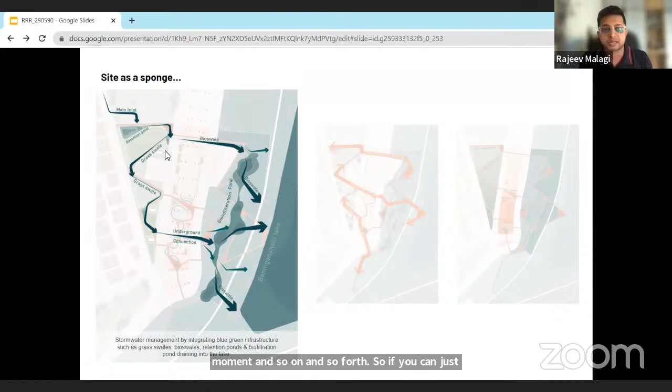Second, if you determined that in the pedestrian layer in the next one, nowhere in the whole presentation did you address the movement of vehicles which are also cutting across this. For me, this is shown as a project within one confined project area, which doesn't have any other external influences like traffic movement and so on. So can you address these two: one with respect to movement of pedestrian versus vehicle, and secondly these arrow marks of water movement.

To answer the first question regarding the movement of water: towards the right side, where we have our ecological park with the wetlands, we know that the water is actually sloping from the west to the east. Within our triangular part, the Kasthuri Nagar Park, we saw no visible level differences that could dictate where the water actually slopes towards.

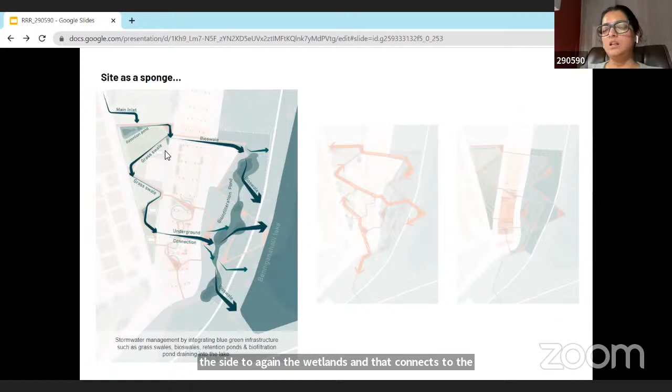So we were thinking that along our pedestrian trails, we could give a provision to slope down towards the pedestrian trails, where the water can be channeled. We have these pedestrian trails cutting across the site to the wetlands, which connects to the lake. So this will provide an artificial channel, not a natural slope, but something we created to channel the water across the site into the lake.

So that was the reason for keeping it along the pedestrian trail. Second, about...

The vehicular movement has not been addressed. Based on our understanding of the project, which might or might not be the case for what was required, we kept it to a relatively conceptual level. Obviously coming to the next stage was the traffic flow, the materials of the roads that will be used there in order to slow down the traffic, and how the pedestrian crossing will happen. So the question of material, infrastructure, and the kind of structures that will come into place, we thought it was the next step into the process of design. So here we've kept it relatively conceptual.

Even at a concept level, I think the traffic has to be resolved even before going to material, and that was the point I was trying to make. But thank you. Yeah, and even the trail is right now cutting the railway line, so you have to... Yes, so for that, when you have to channelize below the railway lines, it will hamper the traffic of the railway when you are doing that.

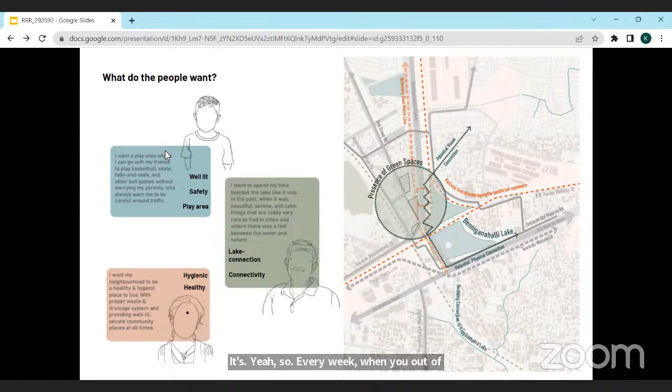Okay, so for that we were thinking that maybe we can introduce overbridges or underpasses, because there is a Kasturi Nagar underpass where the traffic goes under the railway line, and we were considering using the existing infrastructure on site as a reference, as well as infrastructure that can be added on to make the connection more prominent and accessible. That was one way we wanted to go about the design process.

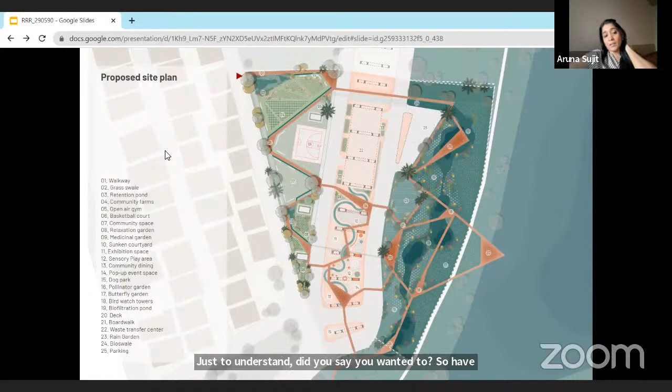Thank you, we have time for one last quick comment or question. Just to understand, did you say you wanted to, or have you done that? Underpass or overbridge? So we have thought of how the connection can be made.

So this is essentially about the larger connection that we want to establish between the site and the upcoming metro station, because that was a point that had come up in the visioning exercise also, that they wanted a better connection to the old Madras Road. We saw that opportunity because there was already an underpass connecting to that part of the site. It was just a matter of introducing more pedestrian friendly infrastructure. There was already a walkway around the southern part of the Benniganahalli Lake, so we thought maybe we can just work with that and connect to the new metro station and the old Madras Road.